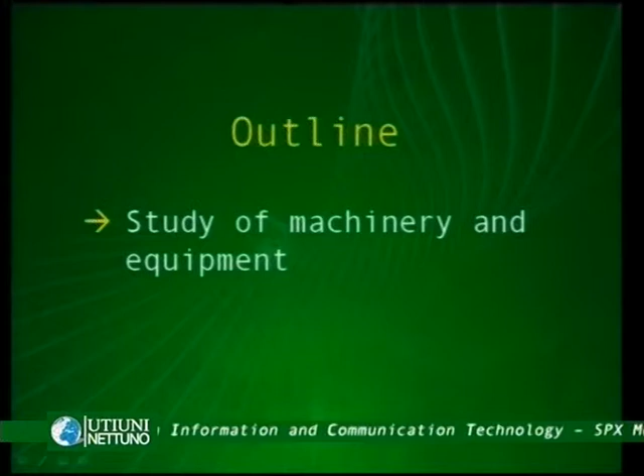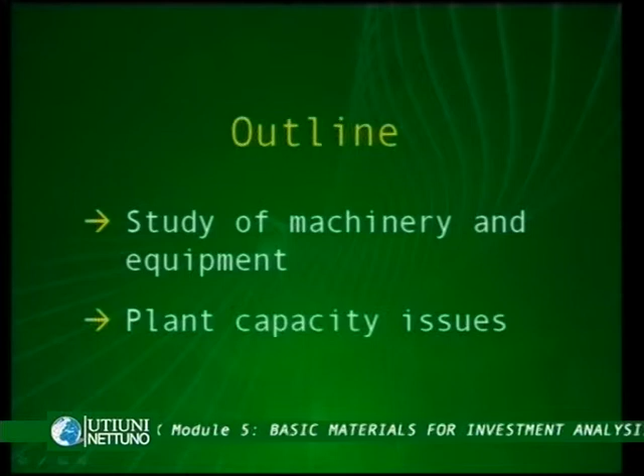The outline is showing two main items. So we will deal with two subtopics today. The first one is the study of machinery and equipment. The second one is the plant capacity issues.

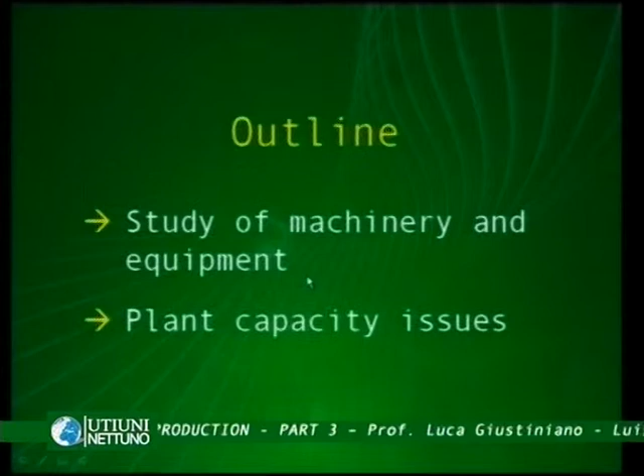So just to create some links to the previous classes, we're familiar already with the idea of product, we're familiar with the idea of materials and supplies. Today we will deal with another important component of production process, which is machinery and equipment, as well as we will deal with a crucial decision on plant capacity that we will continue during next class. So let's start with the first element, study of machinery and equipment.

The selection of machinery and equipment to meet the production requirements is one of the major engineering responsibilities. Now, if we are dealing with the so-called turnkey projects, where the company or the project is just buying a solution from a provider, then the technology is chosen by the supplier and the company is just trusting the supplier about the specifications of such solution. It's trusting the supplier about the knowledge which is embedded in the machinery and the equipment that it's buying.

Otherwise, if we have an internally designed solution, project designers are the ones selecting machinery and other equipment according to the expected technology they intend to use in the production process, according to the expected standards they are going to embed in the products and in the production process itself. So it's about the choice of machinery and equipment. It's crucial to have in mind the production requirements, and it's a responsibility by the actors guiding this decision within the company and the project.

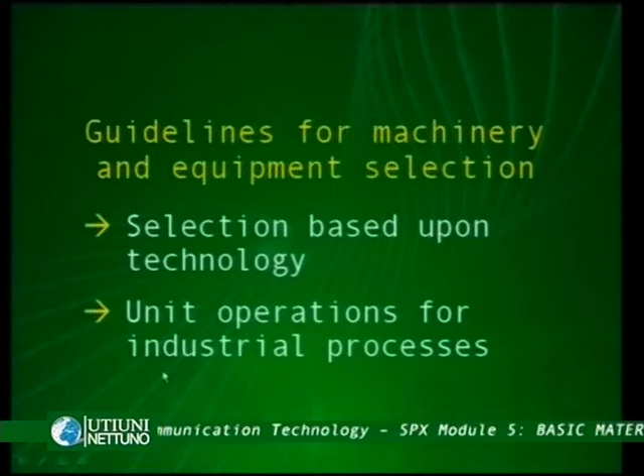So some guidelines for machinery and equipment selection are required. So the selection is based upon technology, as we were saying, which is embedded in the choice or chosen by the internal designers of the production process itself. The unit operations for industrial processes is another very important element. So traditionally, the distinction between batch production and continuous production is very relevant in order to choose among different alternatives of machinery and equipment.

Again, the balance of capacity of all stages. This is another important element, and we will momentarily show that the combination of different machineries or the different equipment during different phases of the same production process is very important. So it's the coordination, the integration, the synchronization of such machineries. It's very important for the enhancement of the installed capacity in feasible terms.

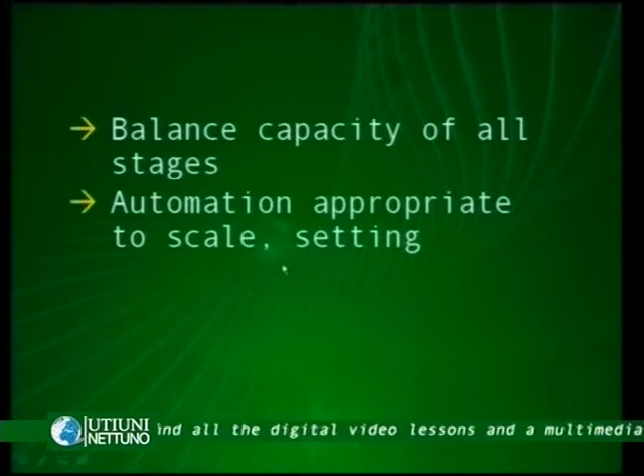Automation appropriate to scale and setting. So basically there is a trade-off between automation and its cost and operation and its cost structure. So we might have some automated activities deployed by robots, for example, and on the other hand, we might have setting issues related to the fact that for each single production or for each single version of the same product, we might require setup times. So, as we've seen already during our past classes on the subject product and production, if we have setup time and setup specific resources, then we have setup costs as well.

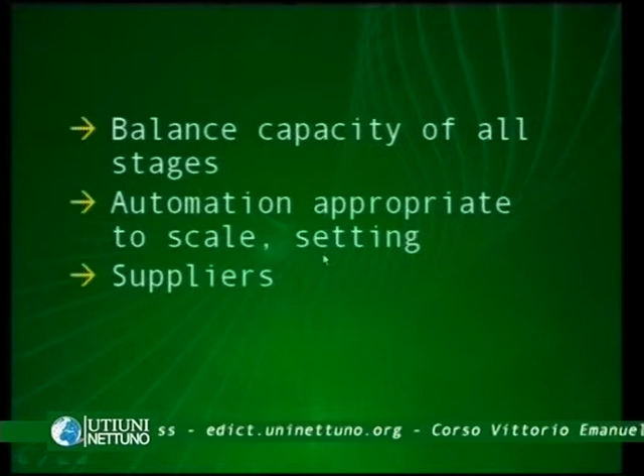Suppliers: the choice of machinery and equipment is dependent on suppliers of technology as well. So considering the location where the investment is taking place, considering the area, considering the industry where the company is operating, the role of suppliers is crucial for technology availability and for technology support as well. So when it comes to suppliers, it's not just the transaction enabling the project or the company to buy specific technological solutions, it's also about maintenance of the machinery and equipment as well.

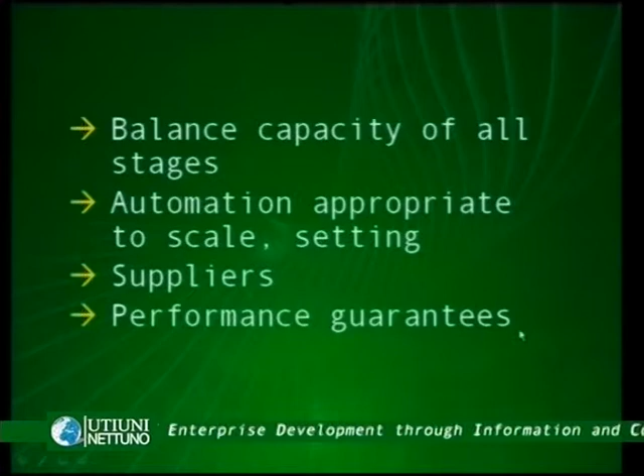Performance guarantees. This element is very important since at the beginning of the project, or ex ante, it's quite difficult to predict what are the dynamics of aging or obsolescence of the machinery as well. So, in order to buy the best solution, the performance should be predicted and set up and made explicit in the deals which relate the buyer to the supplier.

And then we have the equipment life. Again, it's not just about aging, it's about obsolescence, it's about the company not being able to keep up with the technological development. So if competitors are taking advantage of technological development, our company could suffer from the availability of an older technology.

So, in order to deal with the so-called feasible normal capacity, we should consider all these elements, and we should consider also that the productivity or the efficiency or the effectiveness of a production process is also related to the combination of all these elements.

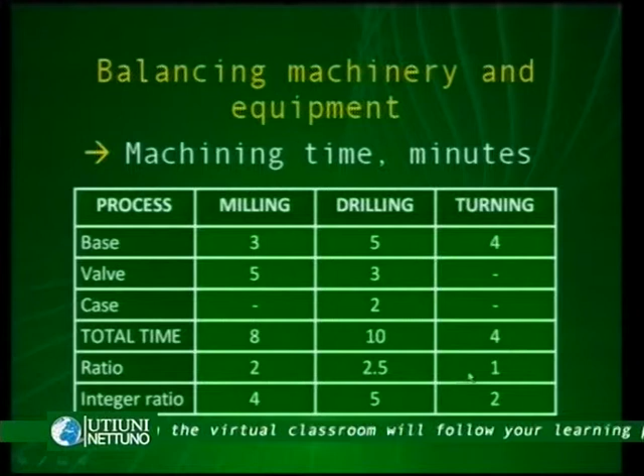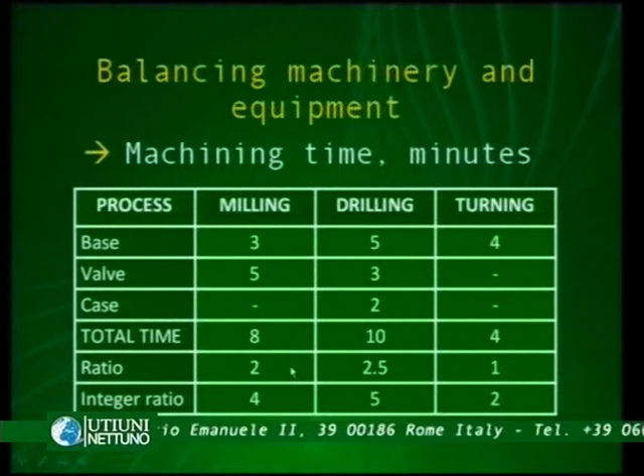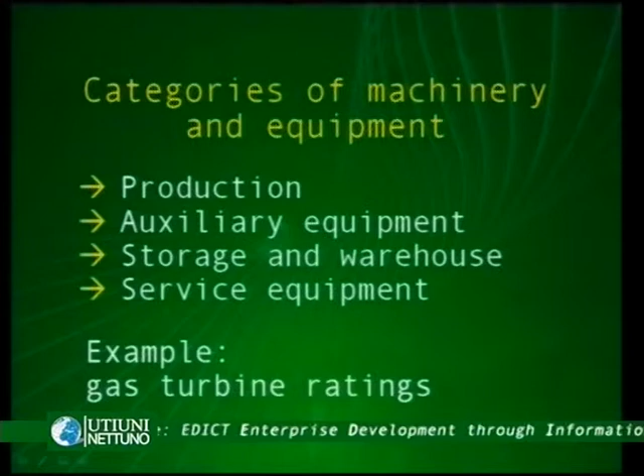If we consider the categories of machinery and equipment, we have different possible forms. It's pretty much the same classification that we have considered for the materials, raw materials and products, for example. So we have production, auxiliary equipment, storage and warehouse, service equipment. So if we consider the gas turbine ratings that you might find in your materials on the website, we might have different combinations of all these elements in order to have an installed plant and description of the production process.

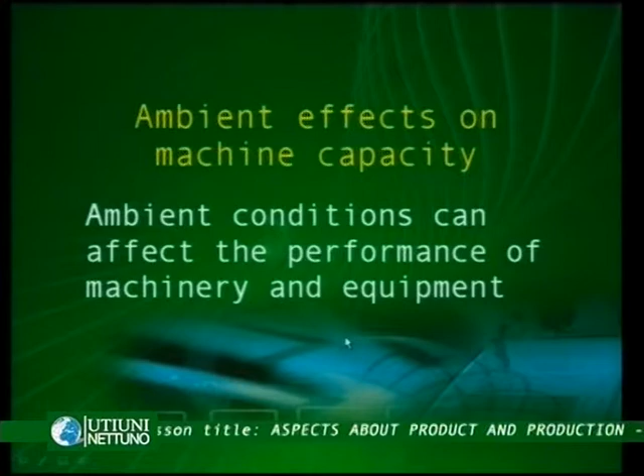What are the ambient effects on machine capacity? Ambient conditions, considering the natural environment, can affect the performance of machinery and equipment. This is an idea we're familiar with already. Let's try to be a little bit more specific. So these ambient conditions could be relative to temperature, humidity, atmospheric pressure, air purity, and wind velocity.

So considering the different elements to which a production activity could be exposed, and considering the fact that the operational requirements of all these equipments and machineries could be affected by the external conditions, all these elements are crucial for the determination of the feasibility, or better, the feasible utilization of the machinery we install.

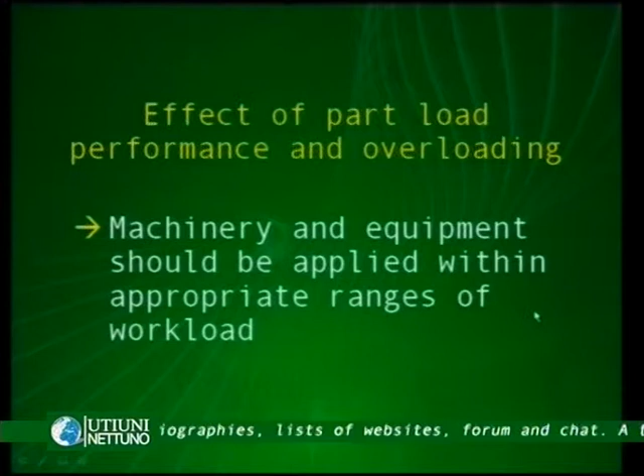Another effect is related to part load. So, effect of part load performance and overloading. Machinery and equipment should be applied within appropriate ranges of workload. So, if the workload is too high, we are operating in overload conditions, then we might have coordination costs, or the pressure on the machine and equipment could be so high that it could boost the operational risk related to the devices.

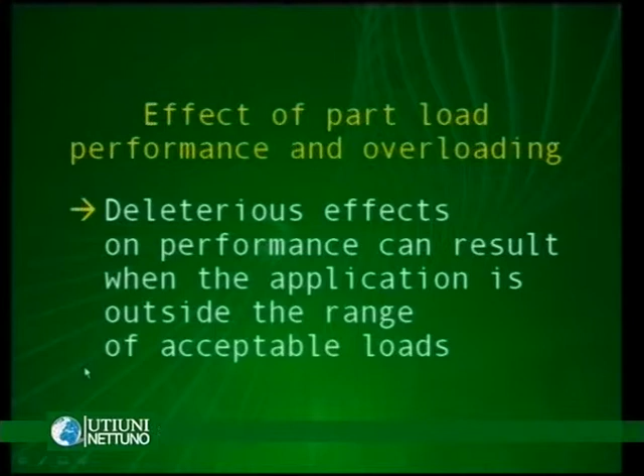On the other hand, if the workload is way lower than installed capacity, then the use of machinery could be inefficient, so the whole project could suffer from higher cost of utilization of such an investment. Another element is the deleterious effects on performance that can result when the application is outside the range of acceptable loads. So either too high or too low.

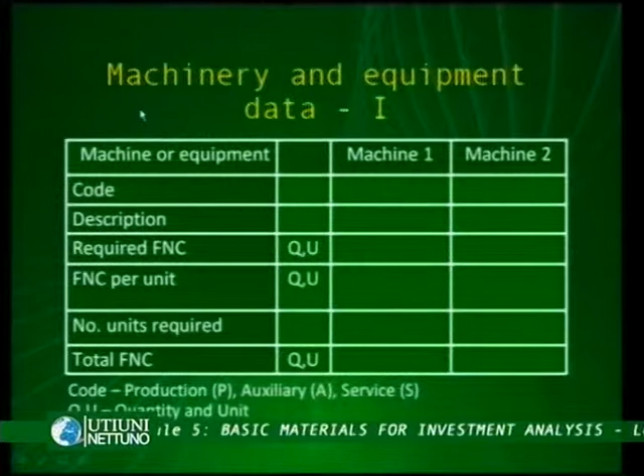So how can we assess the proper load and the proper usage of the installed machinery? Well, in order to define the so-called feasible normal capacity, FNC, we could employ some tables and other descriptive data to be collected in order to figure out what the feasible normal capacity would be. So just to give you an example, we could have different sets of data. So machinery and equipment data, part 1. We have the machinery and equipment, machine 1, machine 2, machine 3, and so forth.

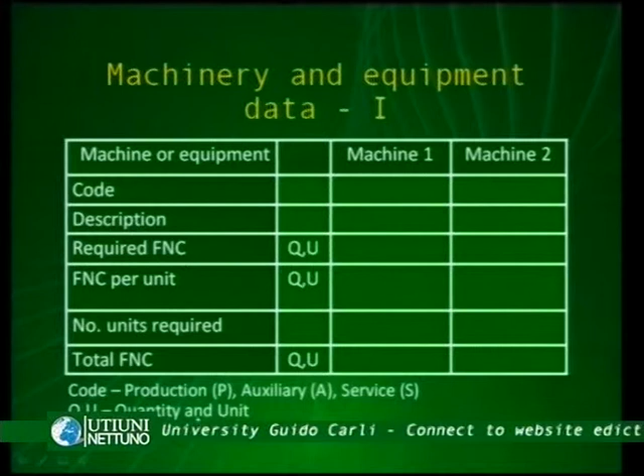Then we have the code, so also the machines should be coded. The description, a brief description of what the device is about. The required feasible normal capacity, both in terms of quantity and unit. So Q and U here in this column stand for quantity and units.

Feasible normal capacity per unit, again quantity and unit. Number of units required, that we have just calculated by referring to the previous table. Then we have the total FNC, again both in terms of quantity and units.

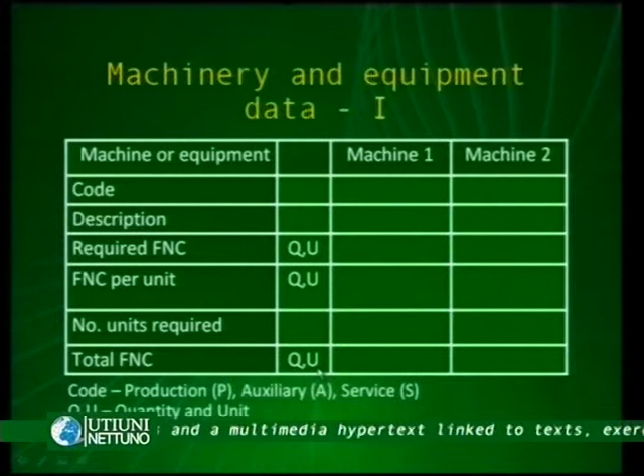When it comes to dataset number 1, we might have a second part as well. So we start from the total feasible normal capacity that we have just reported on the other part of the table. And then we have the connected load per unit, the kilowatt, the load factor, so the percentage of exploitation of such

machinery or equipment, the total connected load, which is again in terms of kilowatt, the power factor, and the total kVA, which is the kilovolt-ampere. So it's 1000 volt-amperes.

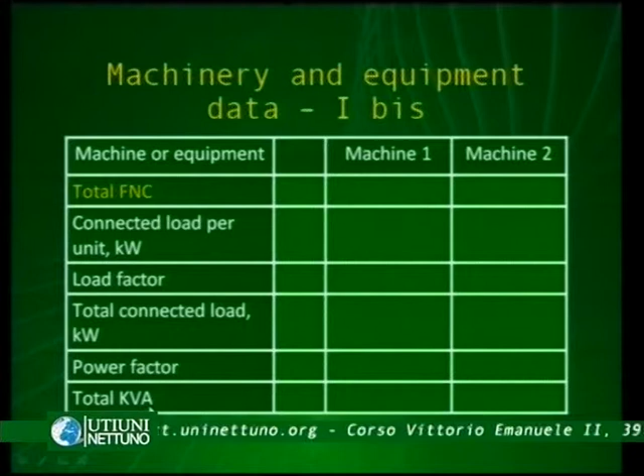We might refer to a different dataset as well in order to expand our collection of information, in order to be more precise and to enhance the level of accuracy for the feasible normal capacity. So dataset number 2, machinery and equipment, we always start from the kVA, so again the 1000 volt-amperes, and then we assess other sources of information and resources.

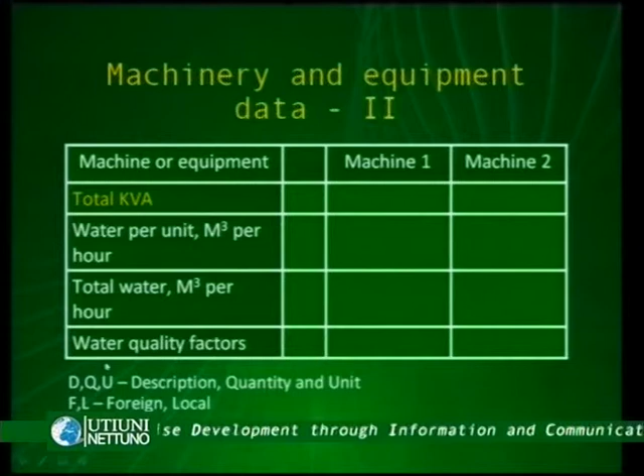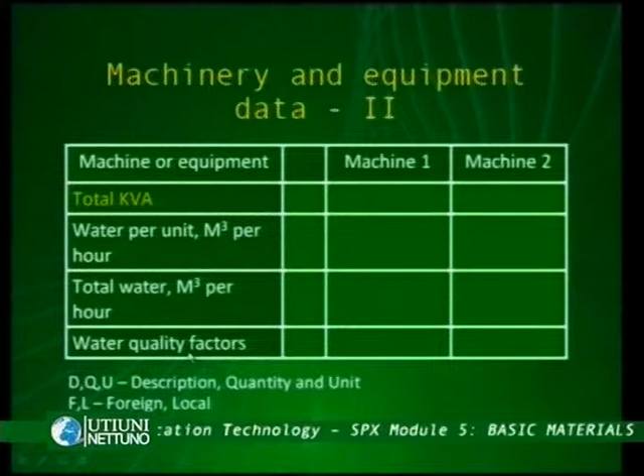Water per unit in terms of cubic meters per hour, total water, again cubic meters per hour, water quality factors. So since water could be a crucial resource for the production process, the level of purity or the level of quality is very important. The second dataset is about other utilities,

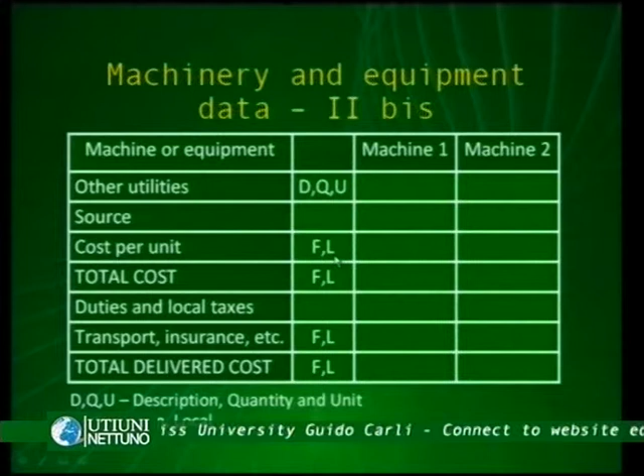DQU, description, quantity, and unit, here, source, and another distinction that could be relevant for the following rows is about the source of procurement. That might be foreign or local. So the cost per unit, both for foreign and local resources, the total cost, foreign, local.

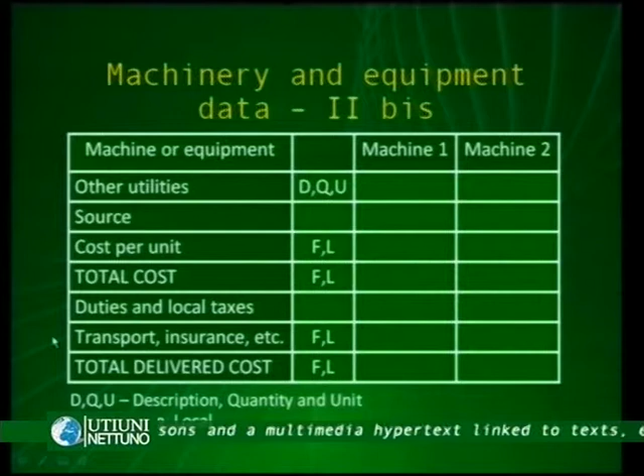Then we might have additional elements like duties and local taxes, transport, insurance, etc. Again, foreign and local. And then from the total cost, we might have the total delivered cost. So if we combine the part related to the production and the part related to the transportation, the delivery, we have the total delivered cost.

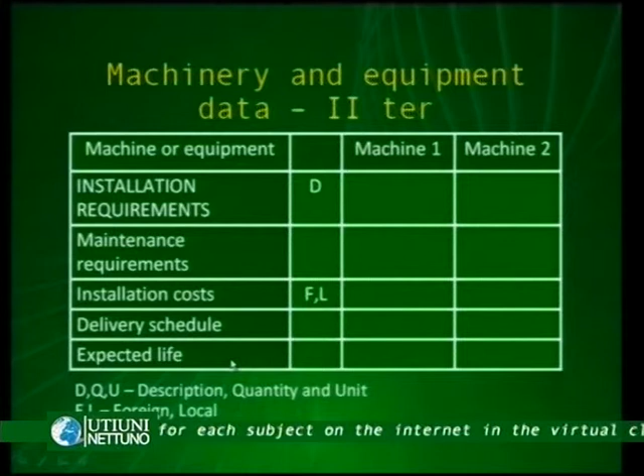Other additional elements in this second dataset, so again, machinery and equipment: we have the installation requirements, again in terms of description, maintenance requirements, installation costs, foreign and local again, delivery schedule, and expected life of the equipment and machinery. So by collecting these two datasets, we might be able to figure out what the exploitation and the usage of the machine might be.

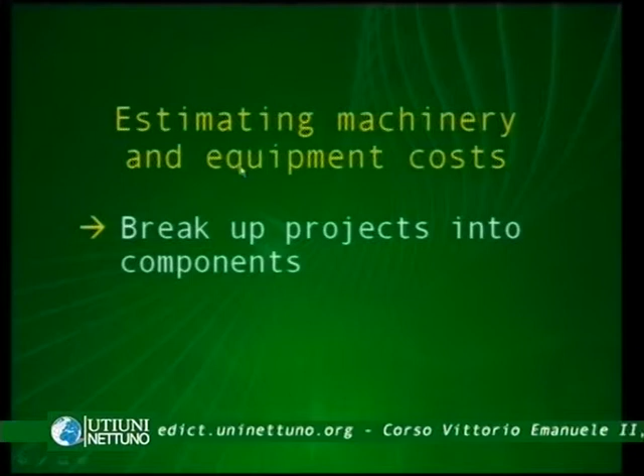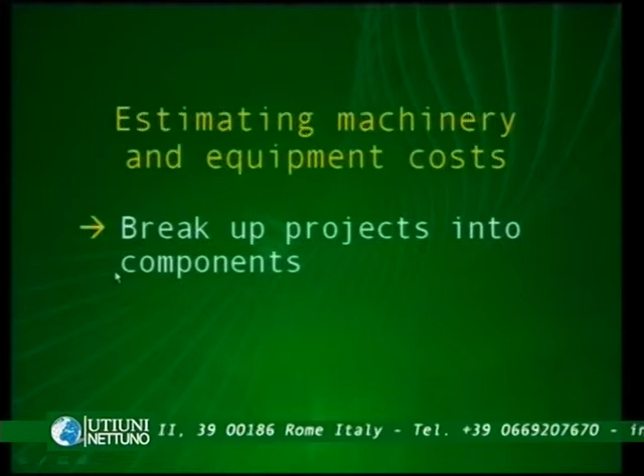Estimating machinery and equipment costs. So we have different elements here to be considered. The first one is to break up projects into components. So in order to figure out what the cost will be, we should break down the project into sub-projects. A useful tool could be to refer to the work breakdown structure that we're familiar with already, and try to employ it in terms of components and subcomponents of the project itself.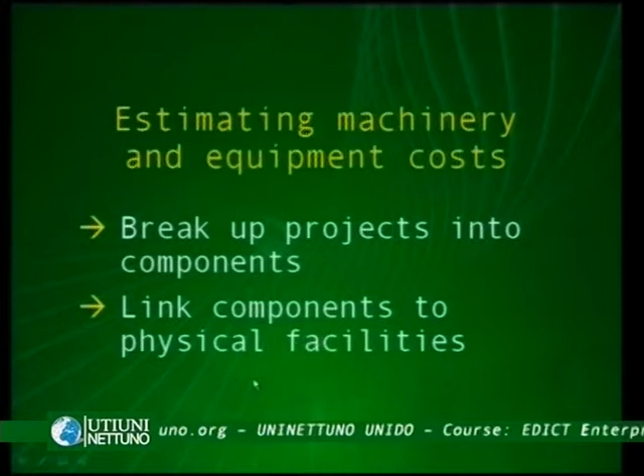Second, link components to physical facilities. So once we have decomposed the project into different components, we could assign them to different facilities within the plant. So it's also about tracing each component as well. Then we might visualize in physical terms through flow charts, for example.

Another important element is to use rules of thumb to estimate in early stages. So this is going to be a recurrent activity for estimating the cost of activities in the early stages. Early stages recalls the idea that the plant is not even existing, so we have to estimate cost factors. As we will see during next class, we should refer to different rules of thumb in order to understand the impact of economies of scale, for example, the impact of under or overutilization of plants, and so on.

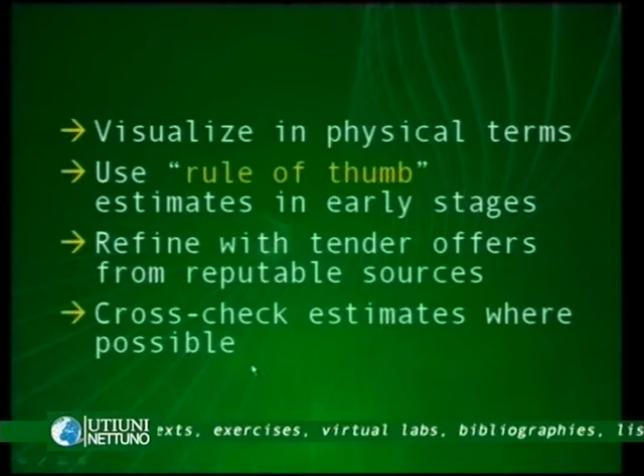Refine with tender offers from reputable sources. So once we have a rough idea about the cost, we could refer to external sources like reputable actors, players, competitors, consultants or suppliers in order to refine our idea of cost. And then cross-check estimates where possible. So if we have different components of the same project, exploiting the links and the similarity among all these components could enable us to cross-check the estimates that we just made.

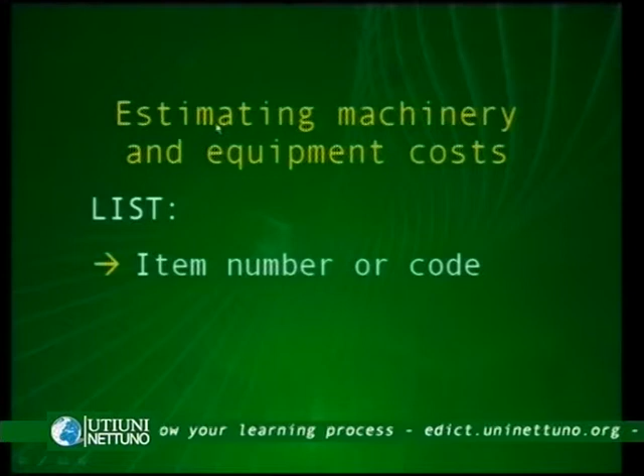So, a concept that we are familiar with, a way to proceed that we are familiar with from the past class, is to consider list and field of application. So in estimating machinery and equipment cost, we should list all the items and code them through item number or code.

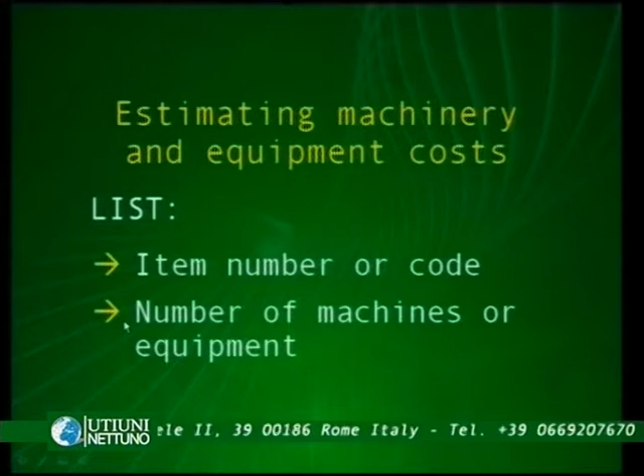Define the number of machines or equipment. Then additional information about the specific sources and utilization of such equipments and machineries, like market, unit cost, total cost, and project periods required, including replacement. So it's not just about where and when in terms of quality and quantity, it's also about the schedule of such activities within the project.

The application of such list is the production equipment, the auxiliary equipment, the service equipment, the initial stocks of spare parts, consumable parts, tools, dies, and fixtures. So the methodology that we have just developed could be employed in different areas. So this is for the estimation of machinery and equipment in terms of study.

Another crucial element in dealing with product and production is the setup of the plant capacity. So we have some plant capacity issues that we will start today in this class, and we will continue in the last one dedicated to product and production, which is the next one. So when it comes to plant capacity, we are exposed to both internal and external factors. Let's start with the internal factors. This picture will help us to understand plant capacity, internal factors.

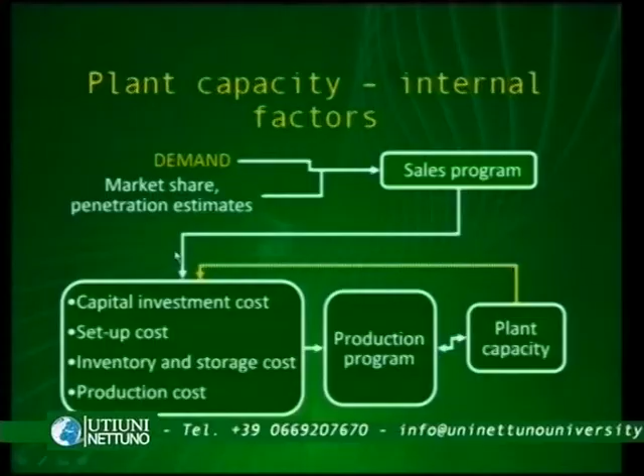The sales program, from this perspective, nurtures some important choices about capital investment cost, setup cost, inventory and storage cost, as well as production cost. So according to the standards embedded in the products that we plan in the market, in the sales, marketing and sales program, we have all the requirements which are necessary for estimating the costs related to capital, setup, inventory and storage, and production cost. Once we have a clear idea of what the cost will be, we might proceed with a program. So the production program is the output of such estimates here.

Production program is about how much we need to produce, when, and according to what conditions. So plant capacity is crucial in order to implement the production process and the production program. So what is this feedback represented by this yellow arrow? It's a feedback connecting the exploitation of plant capacity, as we will see, with the cost related to the invested capital, setup, inventory and storage, and the production cost.

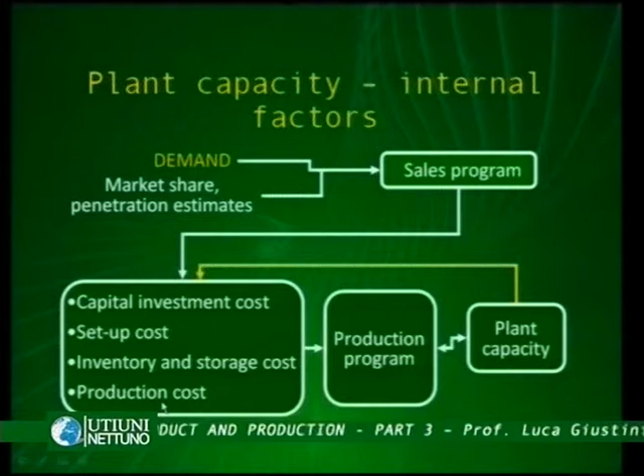So, as we will see in the next class, for example, the actual condition of exploitation of the maximum potential of economies of scale could reduce the unitary production cost. On the other hand, if our installed capacity is underexploited, then the unitary production cost could be higher than expected. So this feedback, this yellow arrow here, depicts the situation that the exploitation, the ultimate and natural exploitation of the plant capacity is crucial in order to have a refinement of the estimation about the cost.

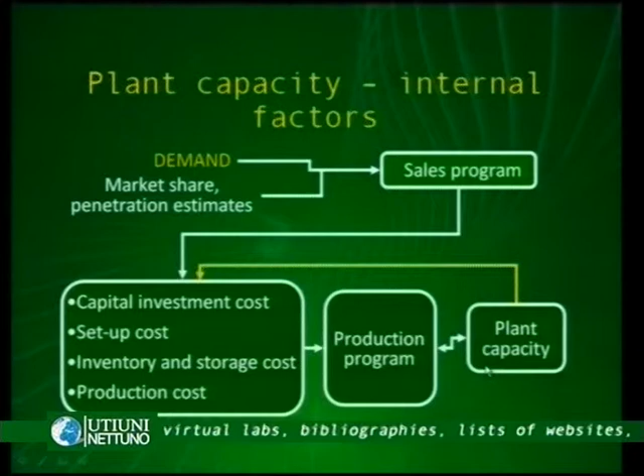It's not just about production cost, it's about inventory and storage cost, for example, since if our capacity, again, is not exploited in a proper way, we might have consequences on the product fixed cost utilization, the sunk cost utilization, while we have an impact on the variable costs like the ones related to inventory and storage as well, and so on. So this is for the internal factors.

So the external environment could influence the range of technological alternatives that we have, or considering the same technology, the environment, both the natural and the economic environments could constrain our possibility to exploit the installed technology. So from these programs, we might choose the technology, and the combination of these programs and the external impact of technologies could define the so-called feasible normal capacity, FNC, that we've seen already.

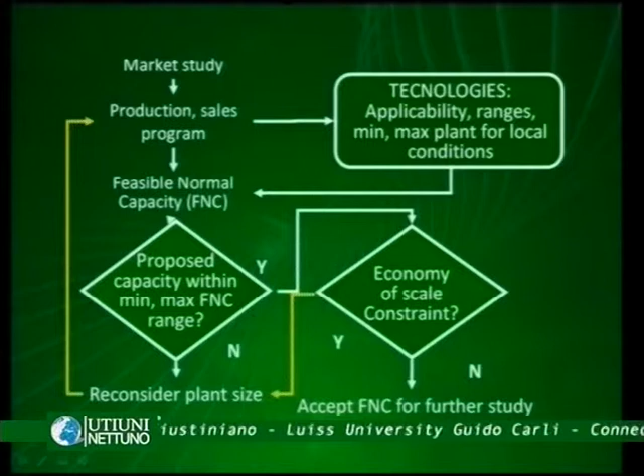Now, the question is: is the proposed capacity within the range, minimal and maximum, of FNC range? So is it sustainable from a capacity point of view? If the answer is no, then we should reconsider the plant size, which means that it's either too big or too small. So we might be inefficient considering the idea of plant size that we have.

So the process starts from this phase here. So we should reconsider the production and the sales program, reconsider technology, and so on. If the proposed capacity is actually within the range of the feasible normal capacity, so the answer is yes, then we should ask ourselves a second question, which is about the exploitation of economies of scale. So, do we have economy of scale constraint?

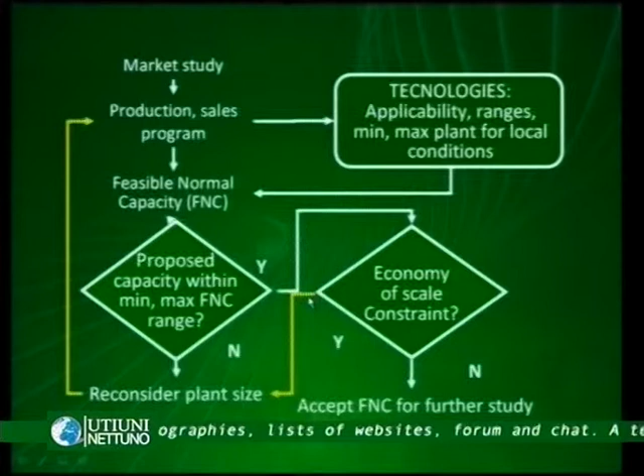If the answer is yes, so we are constrained by the economies of scale, then we should again reconsider the plant size and then start the process all over again. If the answer is no, then we should accept the feasible normal capacity for further study. So,

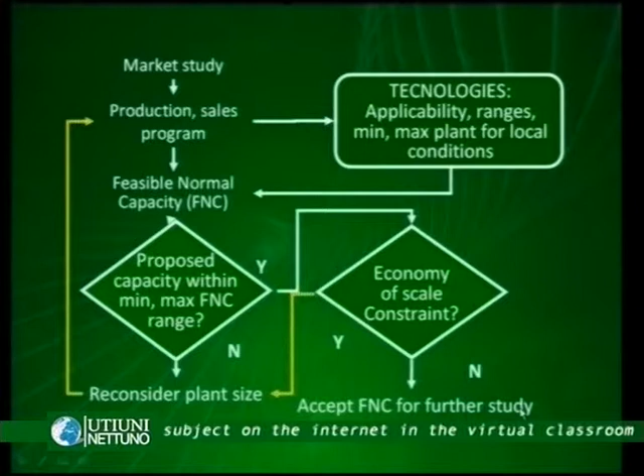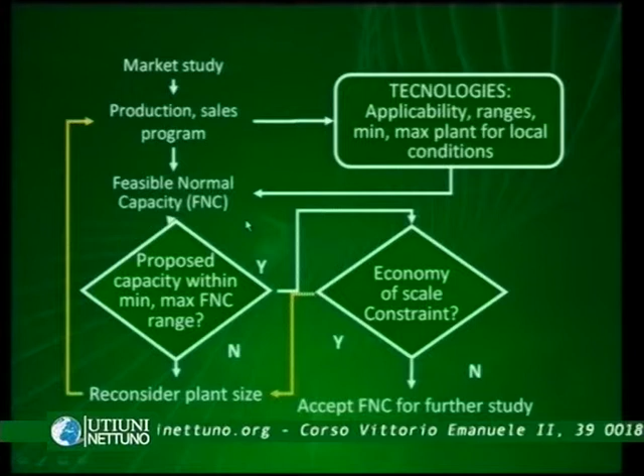the external factors could impact on the definition of the feasible normal capacity. So, to this extent, it's quite clear that the feasible normal capacity is defined by human factors, operational, environmental, and systems engineering factors. So, the feasible normal capacity we refer to is conditioned by both internal and external factors.

Another element that we should consider is the so-called nominal maximum capacity, NMC, which is defined by system engineering. So it's just the installation and the nominal exploitation of the capacity. So in general terms, and it could be other than this way, the feasible normal capacity is lower than the nominal maximum capacity, which means that, for example, if this one is 100, the FNC may be 80.

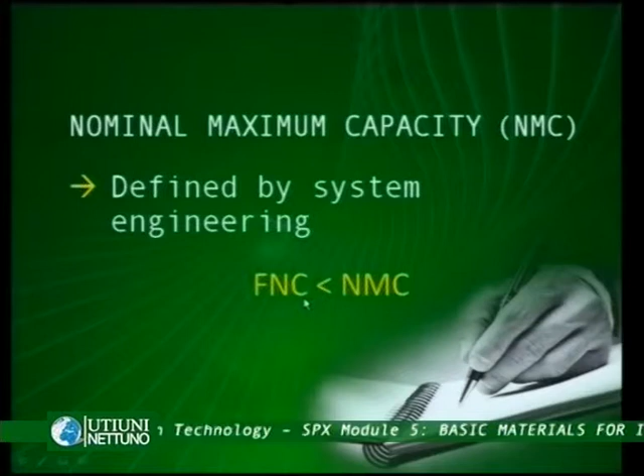So the NMC, the nominal maximum capacity, is related to the equipment installed capacity. So it's nominal. It includes reserve and standby capacity. So a slack of capacity that cannot be exploited by the company, and may be different for various types of production equipment in the plant. So we might have the same plant, but different machineries and different equipment might be exposed to different installed capacity issues. So the nominal maximum capacity is just related to the potential exploitation of machineries and equipment.

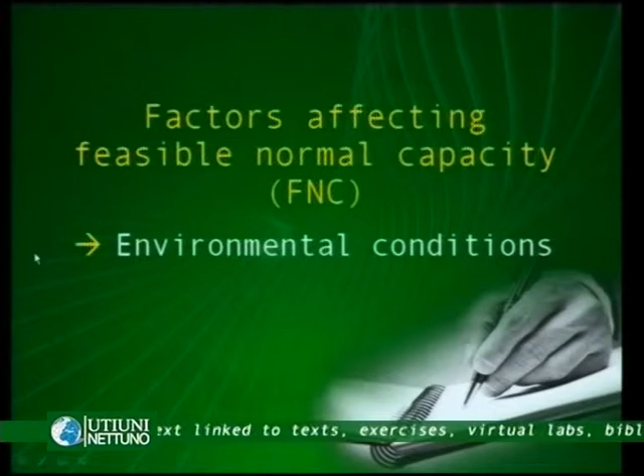When it comes to the FNC, the feasible normal capacity, we have different factors affecting the FNC. To be a little bit more specific, we might have environmental conditions coming both from the natural environment and/or the economic environment. Temperatures, humidity, things like that. Strikes are another important element for the exploitation of the capacity and are related to the economic conditions in the external environment. Second, management and work skills.

So, since we have a constant interaction between the human factor and the technological factor, a skill gap or a skill shortage in terms of specialized skills for these kinds of machineries could be another element constraining the exploitation of the nominal capacity and explaining why the feasible normal capacity is lower than the nominal maximum one.

Again, we might have planned and unplanned maintenance. So each event of maintenance is stopping the machinery. So it's interrupting the functioning of our production process or important parts of our production process. Then we have the so-called reserve capacity. Now,

if markets were steady and presented constant values, then the installed capacity could be able to manufacture and deliver products at the best economic conditions. But as we've seen already, and we will see later in the next class, since markets are exposed to fluctuations, sometimes a reserve capacity is planned in the investment as well, which means that by definition, the feasible normal capacity is lower than the nominal maximum one, since we have slacks of capacity to be used, for example, in case of demand peaks that the company should face.